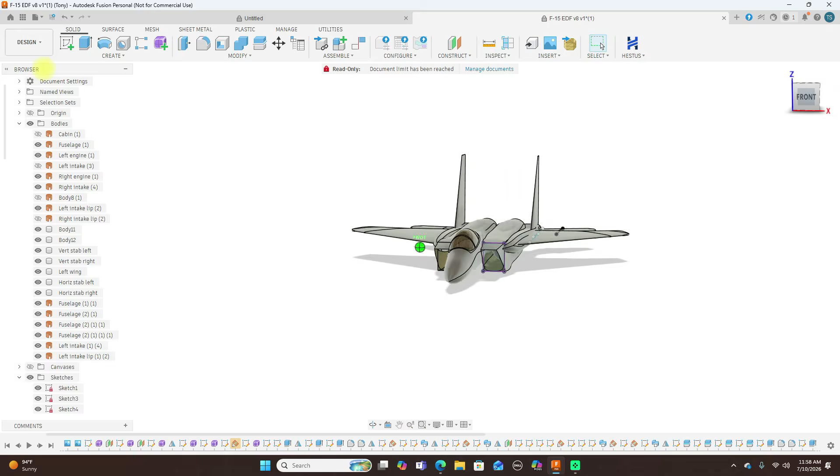Let me turn the sketches off here. Okay, this was done mainly just by using forms. These intakes were done by using some sketches, but pretty much the rest of this is all forms, as we can see here.

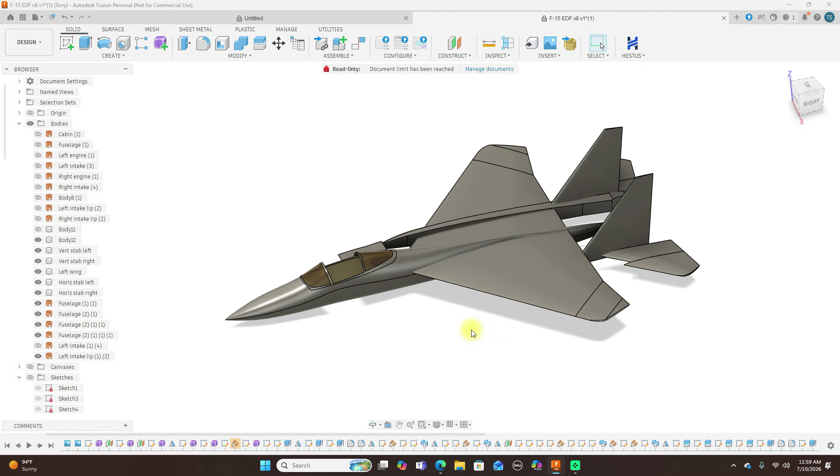So let's go ahead and turn some things off and have a closer look at this thing. That's the part of the canopy there. Okay, turn off a lot of stuff here. Okay, this looks good enough here.

As you can see, this main center was done with a form here. Turn on the canvases. And you can see that, done with a form.

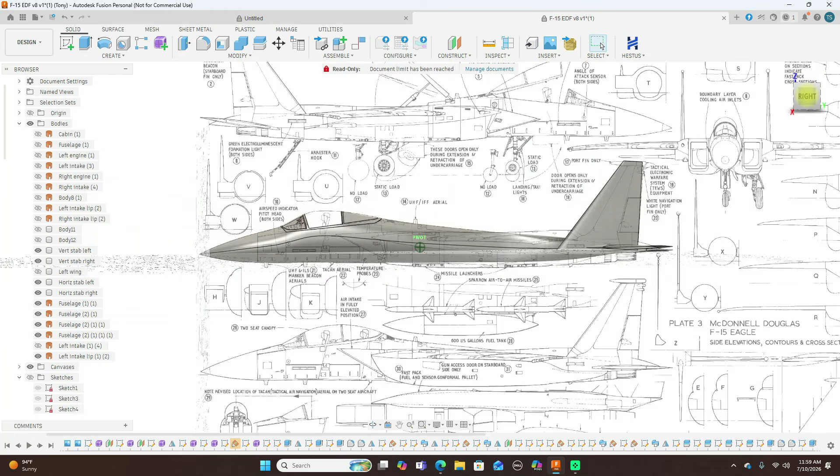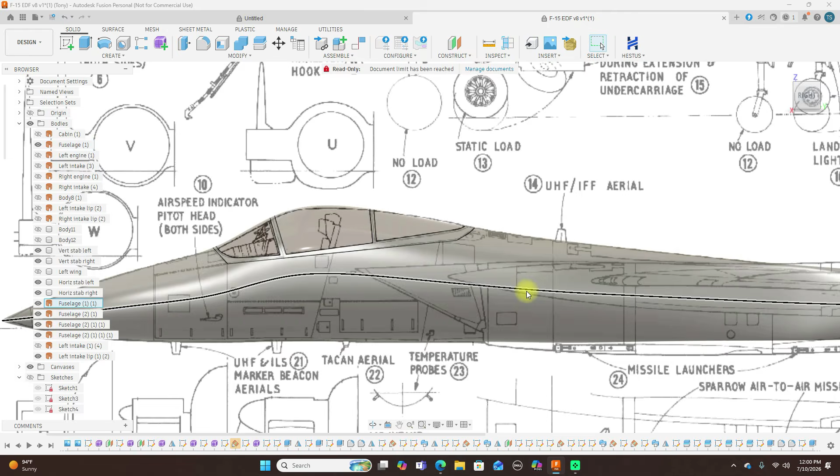Then use sketches to cut this off here. Just use a sketch and sketch a line here to cut this off, then sketch these in here and split all this up. Very simple to do, you should be able to do that very easily. So that's how we got that center there.

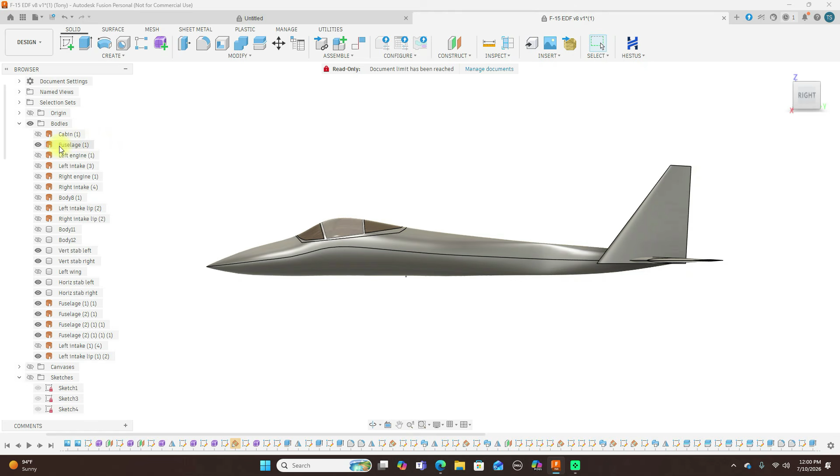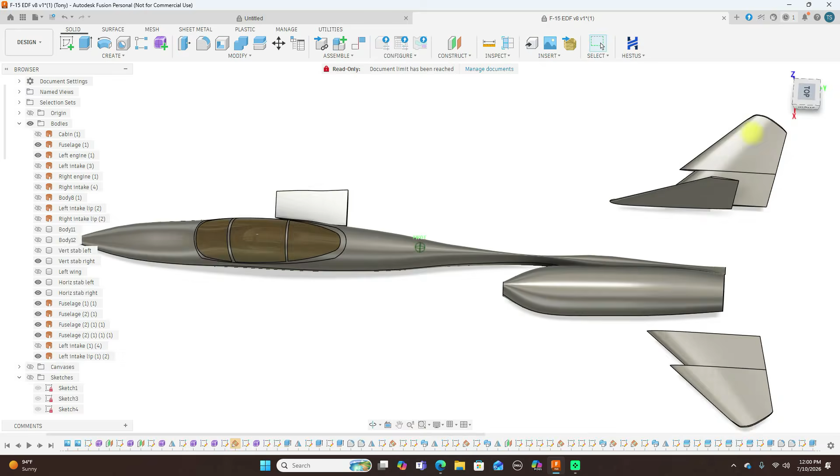Okay, now here is the engine, one of the engines, again. We can see this here. And that's how we got that.

And like I said, if there's enough interest, I will show you guys how to do this. And there's the right engine there, it's just mirrored.

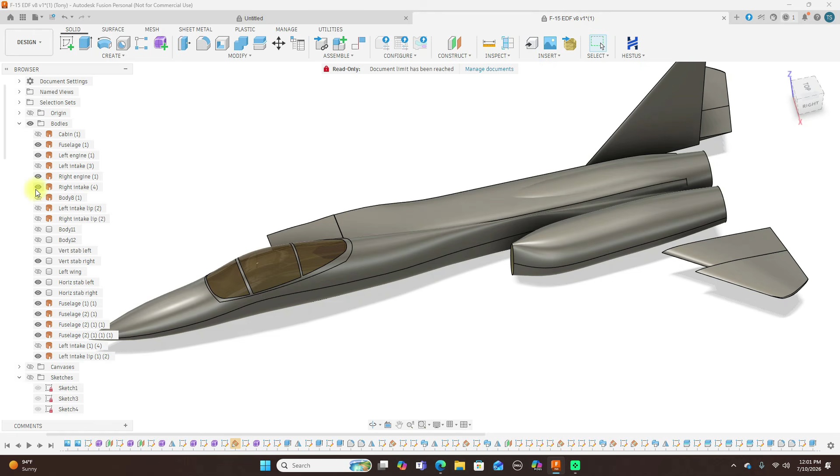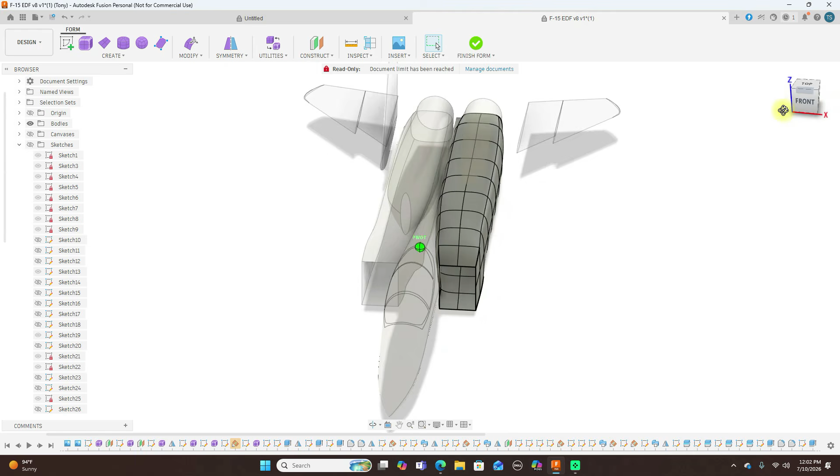Okay, then we have the intake here. And we can see that this is just another form. So it's this here. And you can see that's just a form there. And then once this was done, that was just mirrored over to the other side.

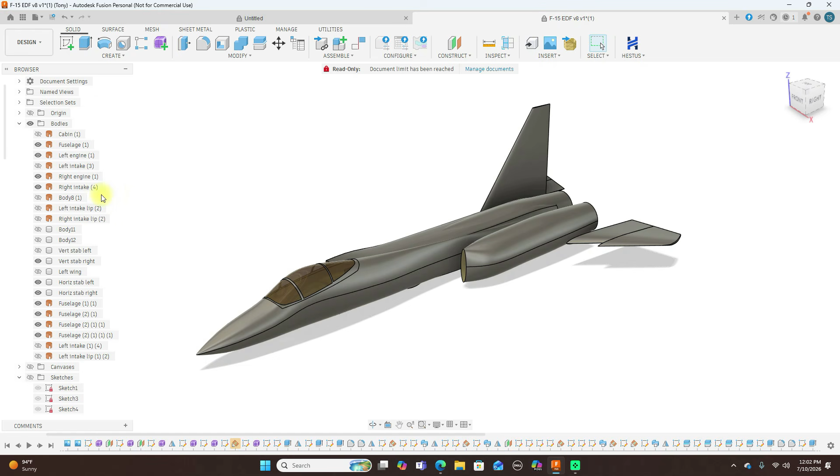Now the intake was not done with the form, it was just done with some sketches, just this back here, and then the lines here, and that's pretty much it. Not much of that. And then it was mirrored to the other side.

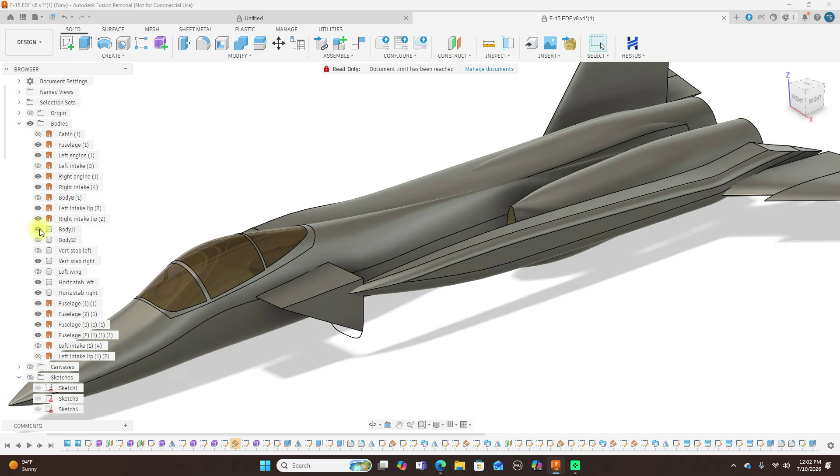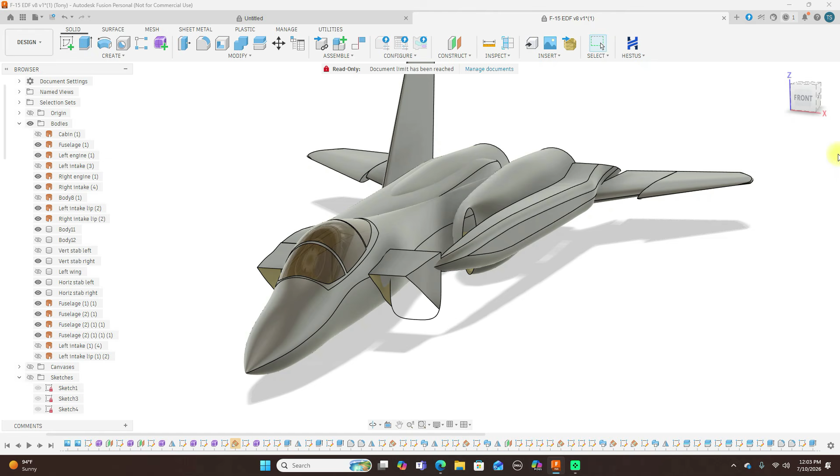Then we have the, I don't know what you call it, a strake here. And this was done with the form also. Then it was just thickened to make it a solid body.

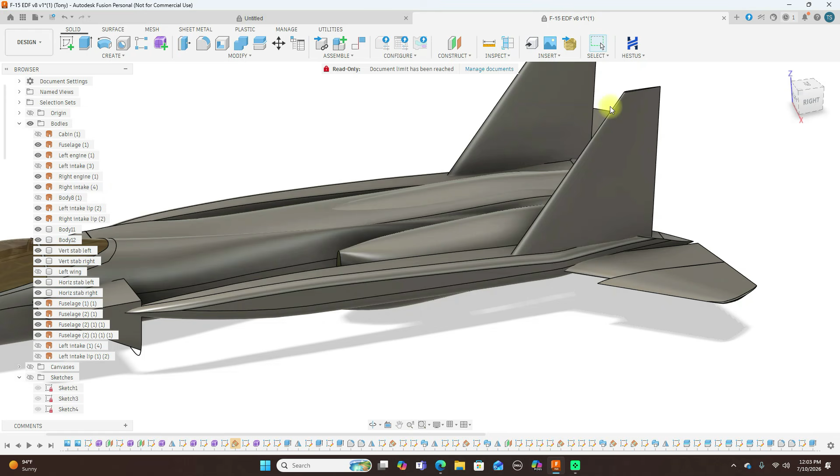And then a vertical stab, just a few sketches to do this. It's just one down here on the bottom, and then another sketch up here for how this comes up. Not difficult to do.

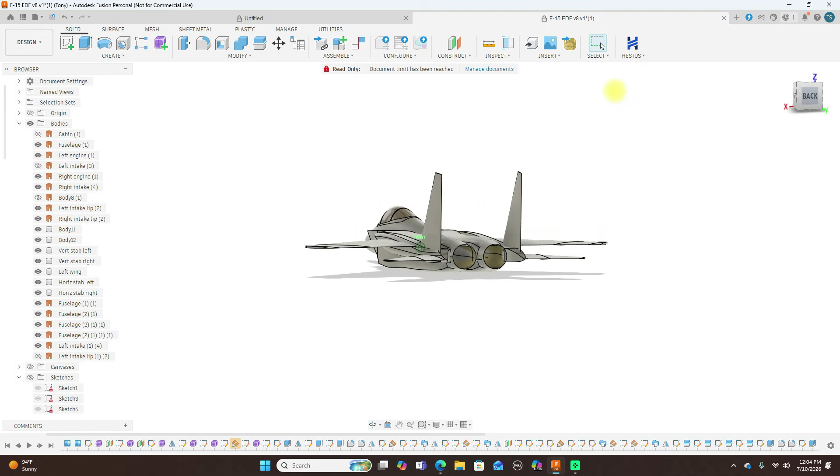Then we have the wing, again simple to do. And pretty much that's it, how to do this. Let me turn this smaller.

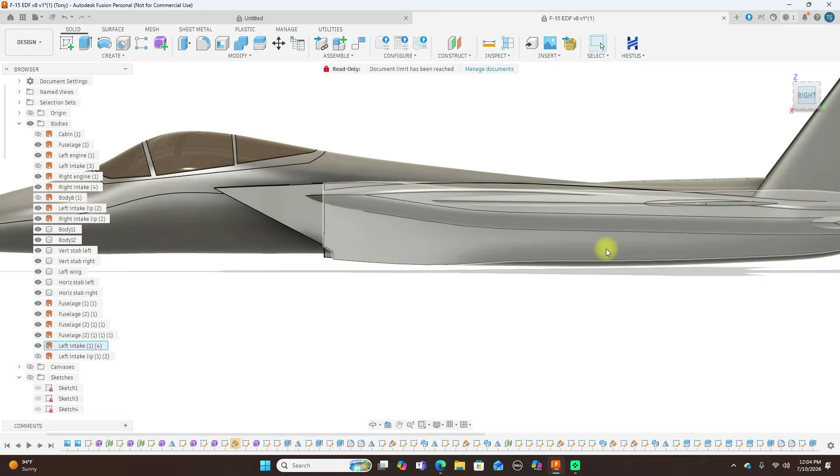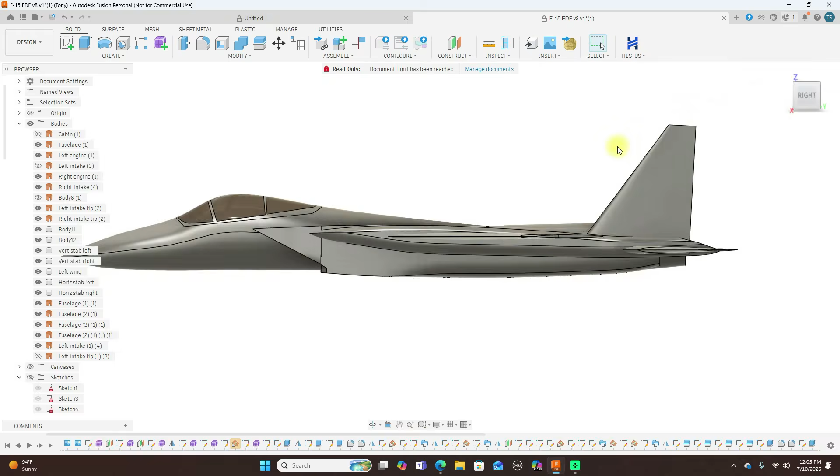So yeah, this is what you can do with forms. You just have to think about how you want to do it to get things to look good. Now, this is not anywhere near perfect or anything like this, but this is semi-scale. You look at this and you know what it is right out the bat, you know it's an F-15.

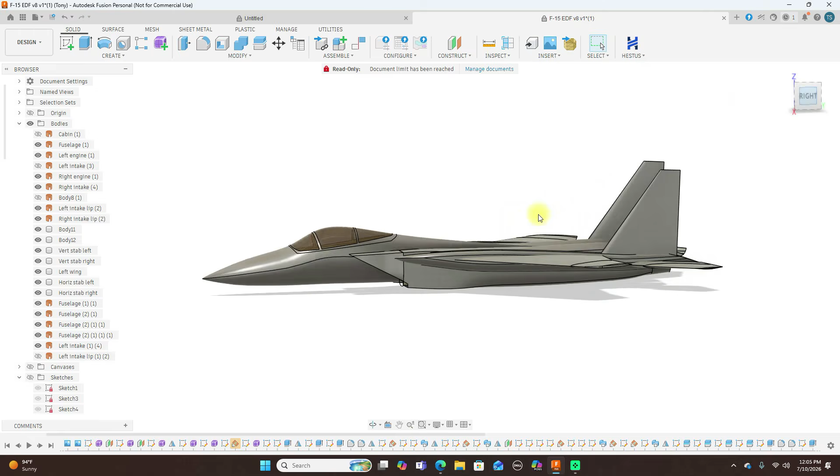And a lot of Russian jets, I believe it's a Foxbat, you can model it the same way as this is done here using forms. And like I said, there's a lot of planes that you can model just using forms, because surface modeling, some people have a lot of trouble with it. And to keep things simple, you can use forms. Just think about the shape that you want and creating that shape with a form.

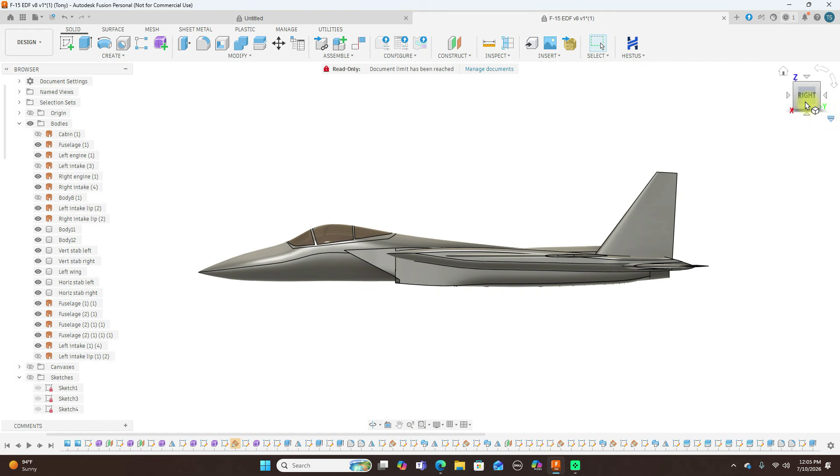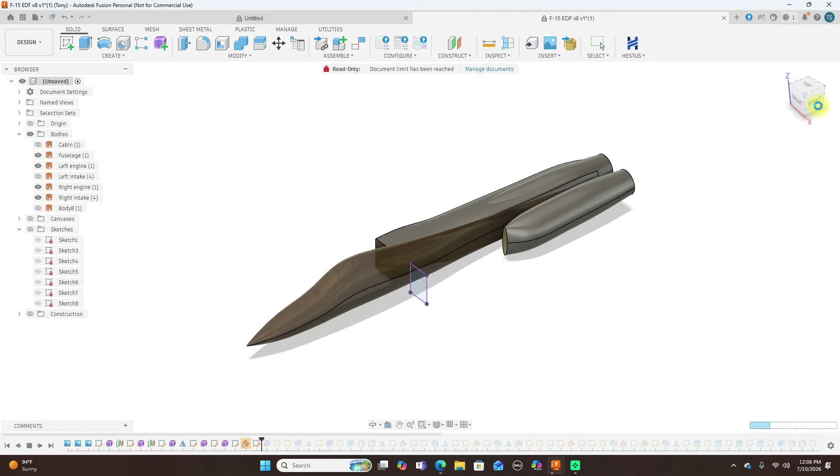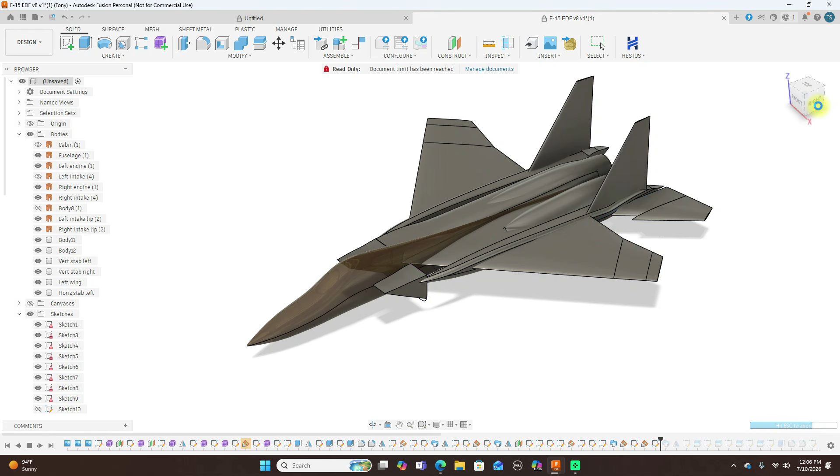But as you can see, this is not that difficult to do at all. So let's go back, roll this back here. And you can see that's how that is done.

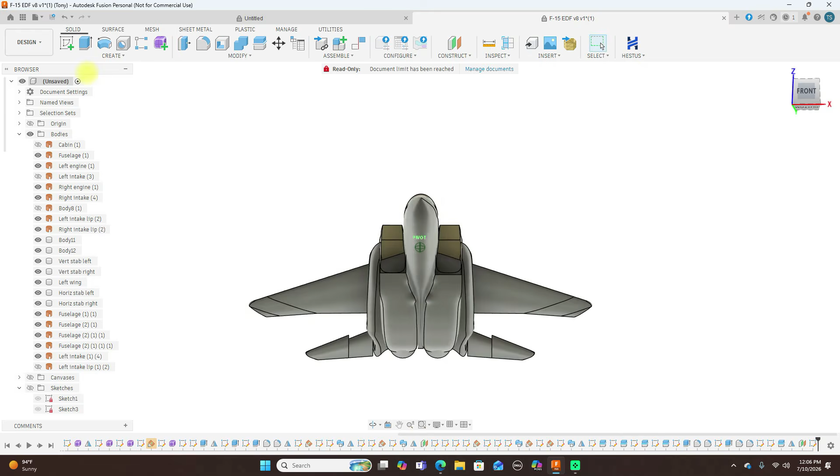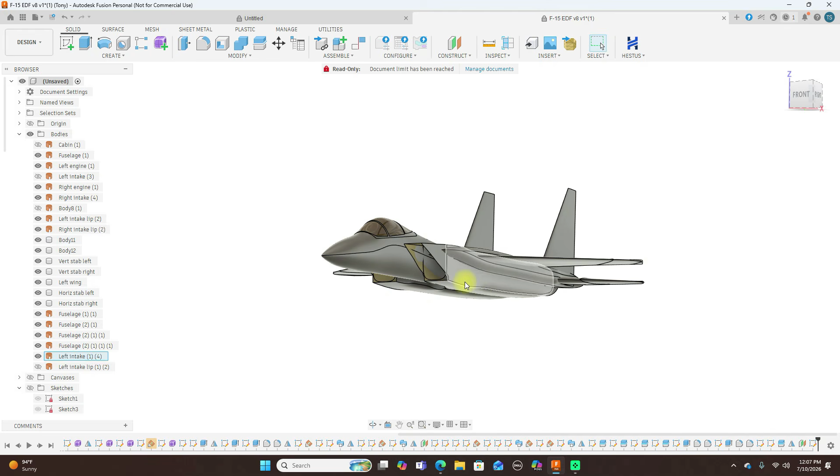And like I said, if I get enough interest, I will show you guys how to do this step by step. This is not hard to do, you should be able to figure it out just from what I showed you here. So just take each thing, do this center section here with the form. Then come back and use a form to model these, this right here, the intake and the engine right here.

And then use another form to get the roundness in here. And then the wings are just straightforward like you normally do.

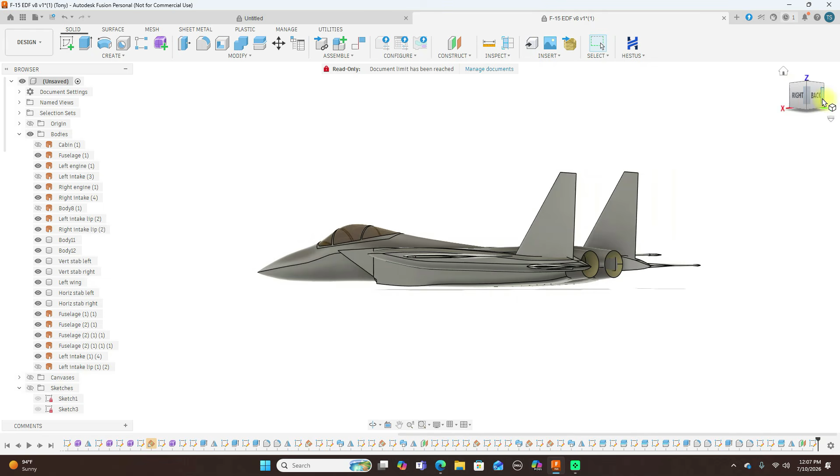And this intake here, what you want to do, you want to put a plane over here and a plane over on the other side. How I did this, put a plane and a plane, and then sketch this on the plane, and then you can just loft between the two.

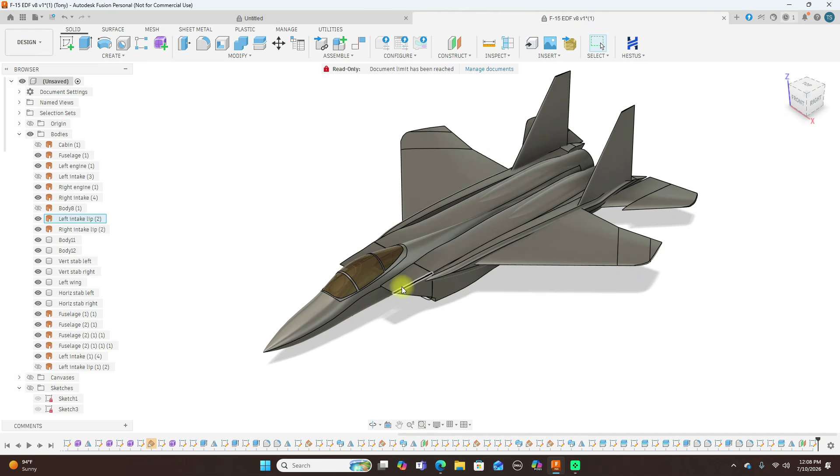Another way you could do this also is just sketch this on the plane and then extrude this over and then hollow this out. Before you hollow it out, go ahead and shape it to the shape that you want and then hollow it out. And you could do it that way too. Nothing difficult.

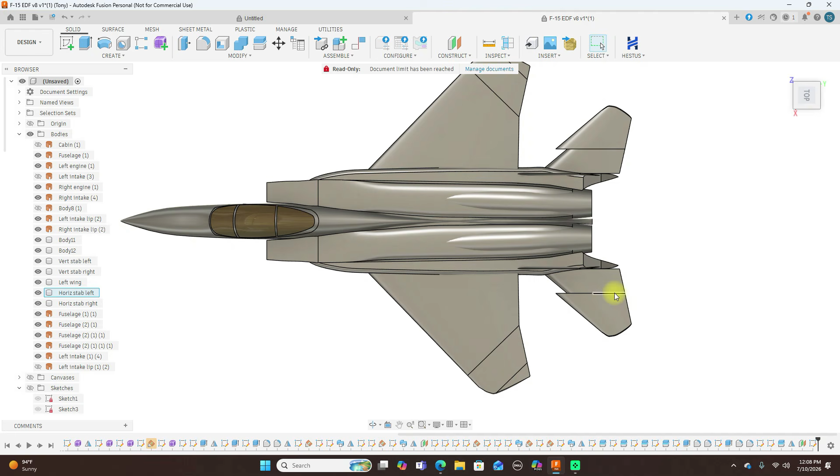And then these back here, you put your profile here of what you're going to do for the stab back here, and then you sketch the lines here, and then you can extrude this out. Then you put your profile of the airfoil on this one, and then do the same thing like you did here. Follow what you just did, and that's not difficult to do at all either.